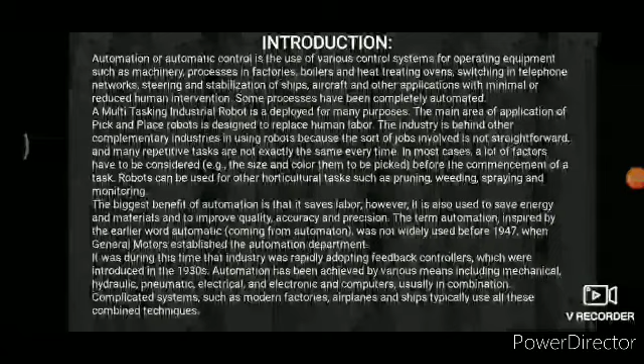Example: size and color need to be picked up because, on commencement of the task, the robot can be used for horticultural tasks such as pruning, weeding, spraying and monitoring. The biggest benefit of automation is that it saves labor. However, it is also used to save energy and materials and to improve quality, accuracy and precision. The term automation was inspired by the earlier word automatic. In 1947, General Motors established the automation department.

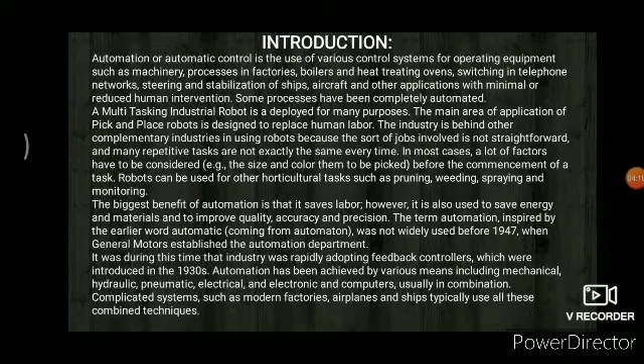Now, literature review. The aim of this is to present the status of current trends and implementation of pick and place robots of autonomous systems, and to outline potential for different future applications. Moreover, we will give examples of economic potential in applying autonomous robotic vehicles compared to conventional systems in different applications. Focus will be put on potential labor cost savings, farm structure implications, sizes for operation, daily working hours, potential environmental impact, energy cost and safety issues.

Types of automation: Two common types of automation are feedback control, which is usually continuous and involves taking measurement using a sensor and making calculated adjustments to keep a measured variable within a set range, and sequence control, in which a programmed sequence of discrete operations is performed. The theoretical basis of feedback control is control theory, which also covers servo mechanisms that are often part of automated systems. Feedback control is called closed loop, while non-feedback control is called open loop.

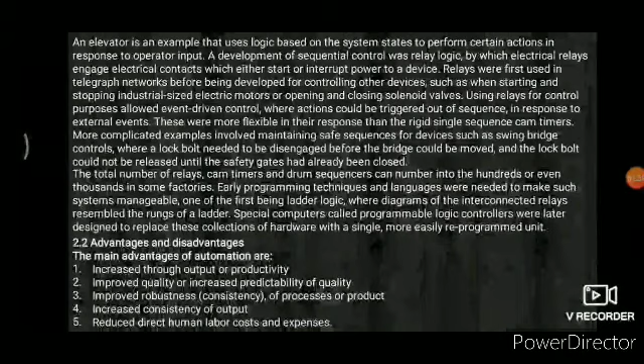Advantages and disadvantages of automation. An elevator is an example, a better example that uses logic based on the system state to perform certain actions in response to operator input. A development of sequential control was relay logic. Electric relays engage electrical contacts which either start or interrupt power to a device.

Advantages and disadvantages of automation: increased throughput or productivity, improved quality or increased predictability of quality, improved robustness, consistency of process and product, increased consistency of output, and reduced direct human labor costs.

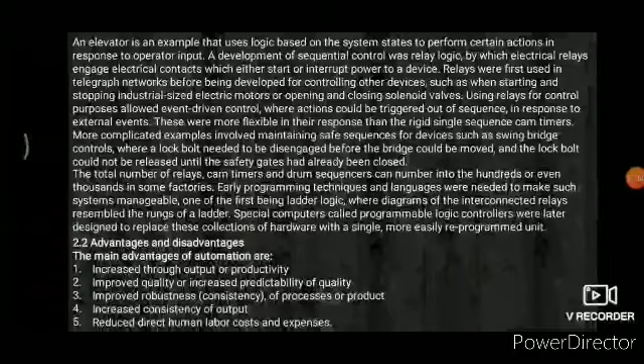Now limitations to automation. Current technology is unable to automate all the desired tasks. Many operations using automation have large amounts of investment capital and produce high volumes of product, making malfunctions extremely costly and potentially hazardous.

Therefore, some personnel are needed to ensure that the entire system functions properly, that safety and product quality are maintained. As a process becomes increasingly automated, there is less and less labor to save, and quality improvement to be gained.

Description of project. Robots are designed for agriculture. Engineers and researchers work to increase the level of autonomous machinery in agriculture, and the best solution is to design and build robots capable of working continuously without human guidance.

Robots deployed for agriculture can deliver high accuracy and low cost, while farmers can have a real-time situation of the task. Robots could be designed to include many agriculture techniques using a limited set of tools and replacing human laborers. A fully autonomous agribot should have the ability to understand the environment, work for an unlimited time without any operator intervention, be capable of environment adaptation when changes occur, and ensure security for humans.

You can see the visualization in the image provided below. Now this is about a solar robot used in vines to cut grass and weeds.

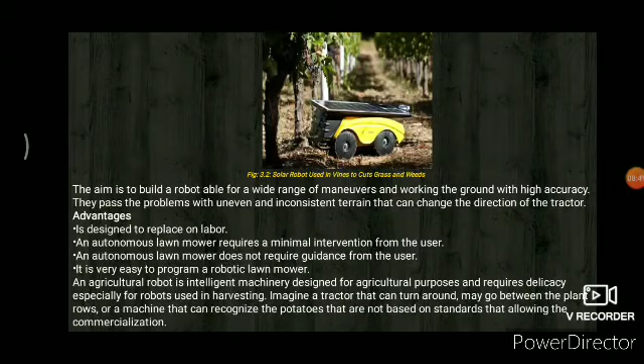Working of the agribot, that is, material and methods. The agriculture mobile robot is designed for sensing agronomic parameters of the most important Brazilian crops: maize, sugarcane, soybeans, and orange.

Dimensionally, it has been established that the structure needs to be capable of operating in crops up to 1.8 meters of height with variable intra-row spacing.

Now, traction: the most common traction systems found are wheels and tracks. The track system has better distribution of load on soil, significantly reducing compaction and disturbance in the soil.

Steering: among the steering systems found, there are differential steering, articulated steering, and wheel steering. Differential steering works by the difference between the rotation speed of the right and left wheels or tracks.

Motor: the motor of the vehicle must be easy to control, supply, and install. It is also preferred that it could be used indoors for testing. Therefore, electrical motors for the steering and propulsion system have been chosen because they meet all the necessary requirements.

The disadvantages of AC motors for this application are difficult control and the need for a frequency inverter. The advantages of brushed DC motors include low cost, high reliability, and simple control of motor speed.

Modules in the agribot project. We are designing the project in CATIA software, and we are doing analysis in ANSYS. Now you can see the design of the agribot in CATIA.

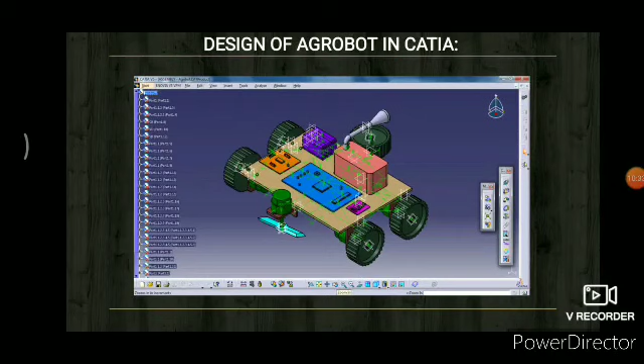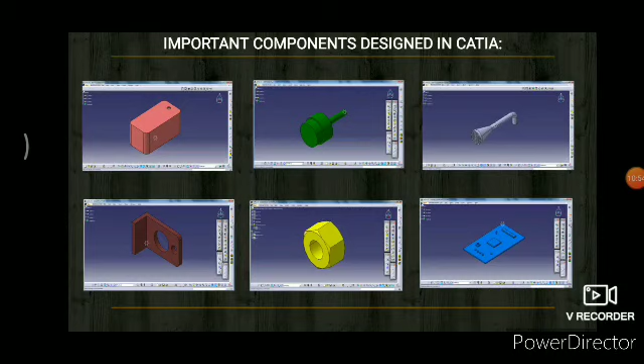These are the important main components of our project. Now, after designing this, we are doing analysis of the agribot in ANSYS.

Now our geometry type is solids. Now we will give other operations, specifications, meshing tools, and all. Now you can see that the solution is done.

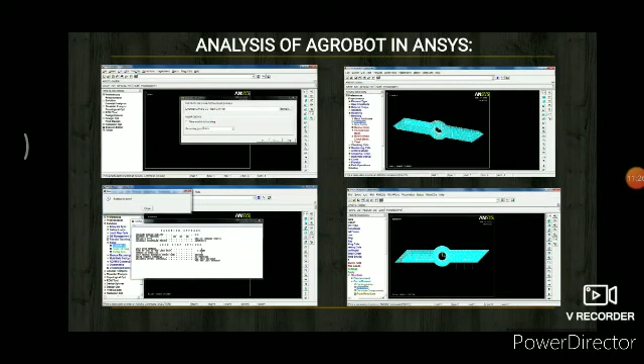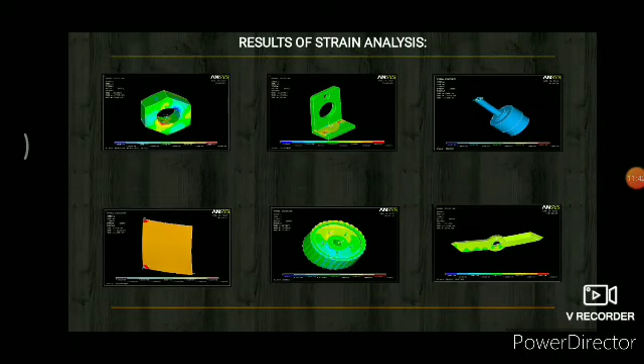It is fully analyzed and ready for fabrication. Results of displacement analysis, and results on the basis of stress, we have analyzed this. Strain also we have analyzed. Now, advantages.

Agricultural robots are capable of collecting crop and soil samples. They are small in size. They are also capable of moving, spraying pesticide, finding diseases and parasites, and performing mechanical weeding. Agricultural robots may have cameras and sensors which detect weeds and other forms of stress.

Disadvantages: it is not currently scale neutral. Better sensors would help. Improved scouting programs would be essential. Nevertheless, periodic human presence in the field is likely to be necessary for the near future. Energy issues are costly.

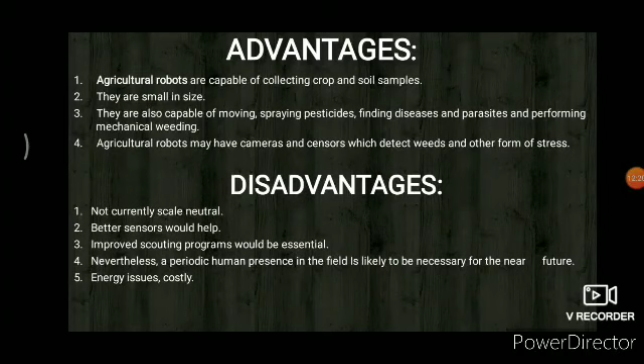Now, the last conclusion. The higher quality produced can be sensed by machines: color, firmness, weight, density, ripeness, size, shape, accurately.

Robots can improve the quality of our life, but there are downsides. It may mean a rethinking of how crop production is done. Crop production may be done better and cheaper with a swarm of small machines than a few large ones. Thank you.